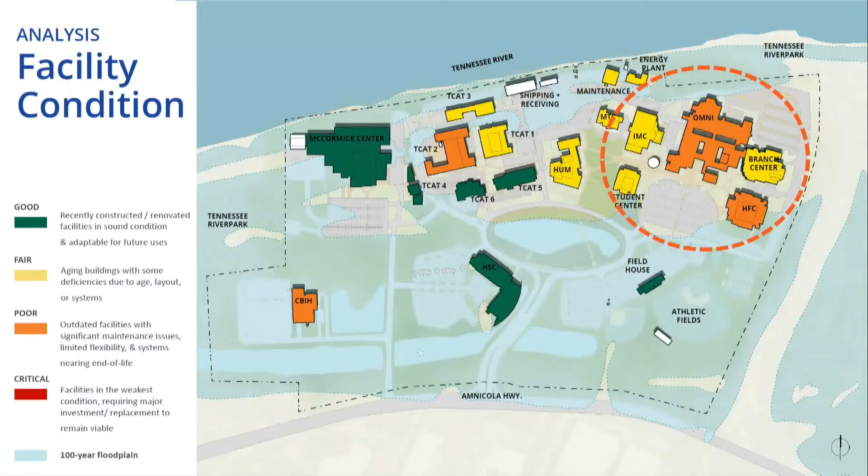As well as to the corner, the Health and Fitness Center. Those have deferred maintenance; their systems are coming to the end. They are not flexible for renovation to the kinds of space needs and configurations for modern learning, and they also are inaccessible in many different ways for mobility, visibility, and audibility.

So the campus plan correspondingly looks at major recommendations in that corner of the campus. On this plan, you'll see the demolition of the existing Omni building highlighted in A with the dashed line, and B, the reinvestment in a major transformative building that I'll touch on later that will be a landmark for academic and student success.

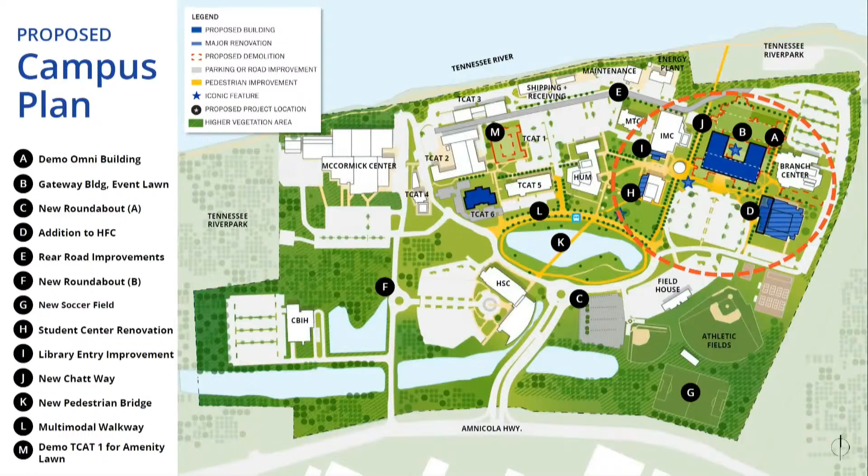Additional small renovations to the surrounding buildings augment what's happening internally and create a front door experience and programming adjacencies for the new Gateway building, the new landmark building. You see those in D, H, and I, also in blue. And then J, K, and L, looking at improved pedestrian connectivity that knits all of this together with buildings in good condition in other parts of the campus, as well as safe vehicular circulation in gray, which is C, E, and F.

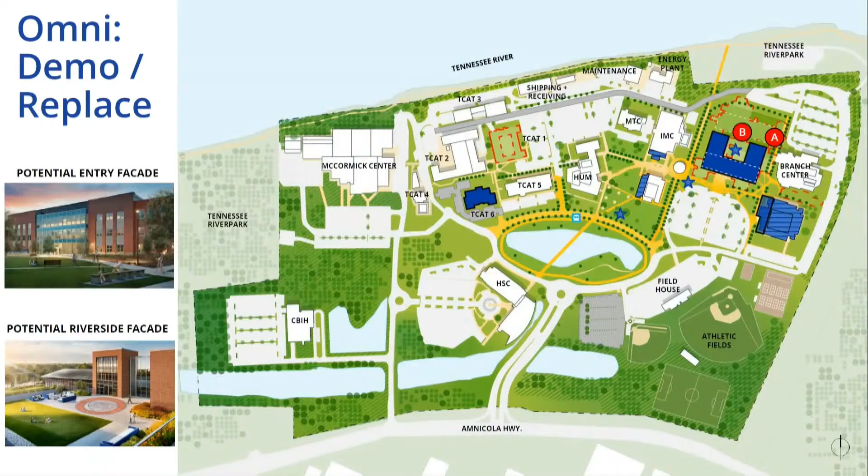So if we highlight each of these, I'll start first with the Omni building replacement, the new Gateway building, and that is to create a dynamic front entry for the campus. It's to put learning and student success on display, to create a front porch experience, and to do all of this with less square footage than the existing building. It also creates an iconic riverfront experience, an event lawn that welcomes students and the community to the campus and creates a strong riverfront presence.

Moving next door to the Health and Fitness Center, that again needs a major revitalization. It augments the programming for student success that's in the Gateway building, and it focuses on improving student wellness for their capabilities as well as academic programs located there.

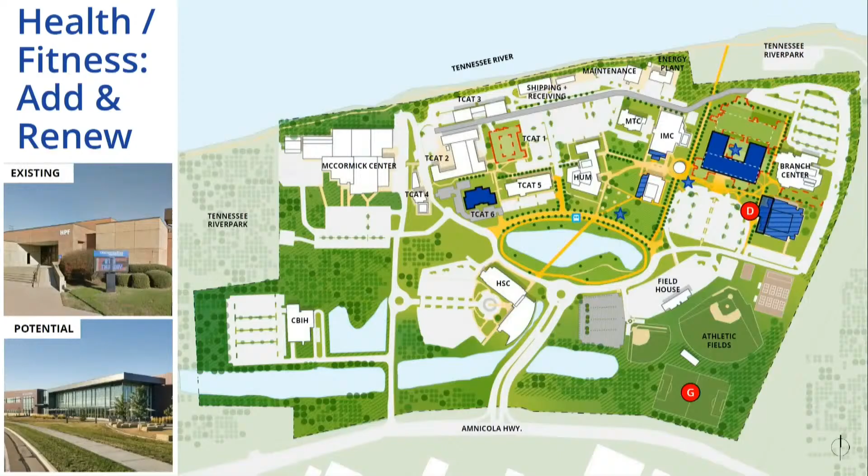There's also a soccer facility, a soccer field in this area that also enhances programming and partnership capabilities for sports on the campus.

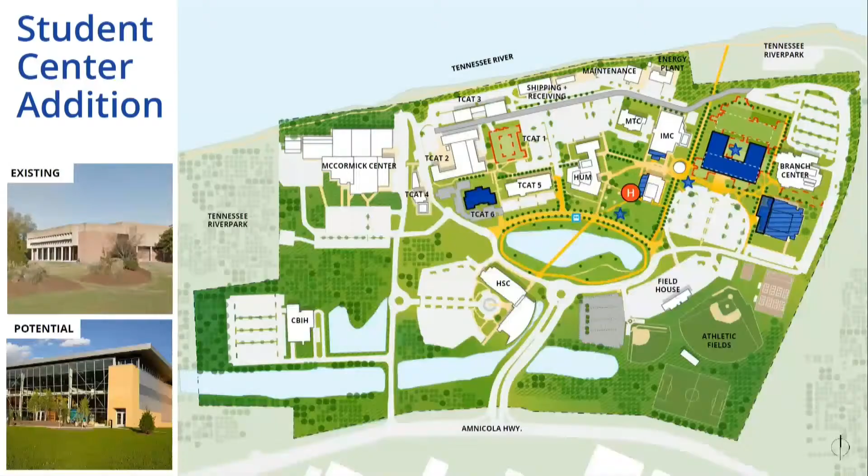On the other side of the entry to the Gateway building is the Student Center addition, again augmenting changes that are happening on the inside, letting students have an accessible entry, one that creates a front door experience that amplifies what is already happening for the Gateway building and creates a better mental health experience with enhanced daylighting and wayfinding.

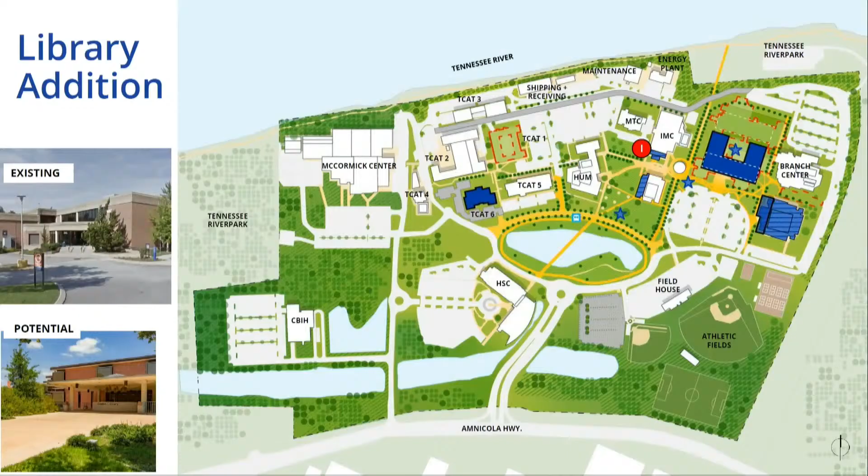Finally, an addition to serve the library, creating a clear, accessible entry there, really focusing on that team-based study space and learning I mentioned earlier, and positions the entire instructional media center in that facility to be that academic support hub right next to the new Gateway building.

Also in yellow, you'll see this network of pedestrian connections that really helps the buildings all connect to the Gateway building, the investments and the facilities around it, and also completely transforms that understanding of how to move from facilities in great condition on the perimeter of campus all the way to the river and the open space around the Gateway building.

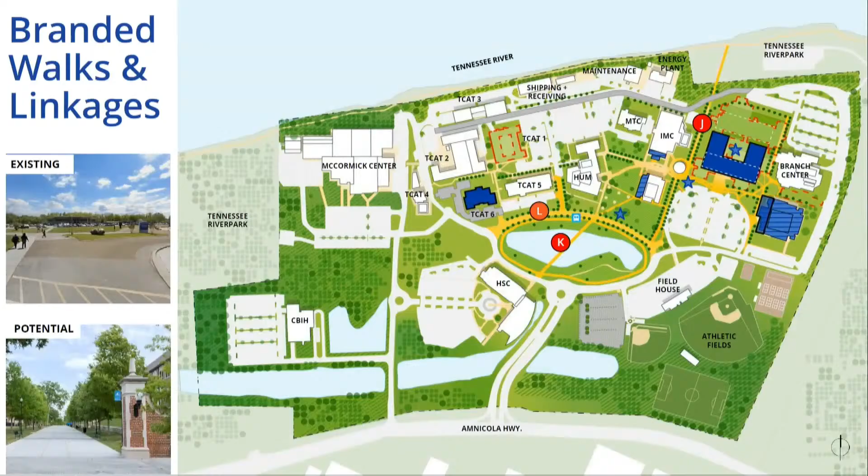Last, but certainly not least, circulation is dangerous in places on this campus. So looking at the new roundabouts that are being positioned, as well as an improvement to one-way roads and completion of a campus loop road, again, allows seamless vehicular movement to the Gateway building, but to other buildings, drop-off and services that complement the pedestrian experiences.

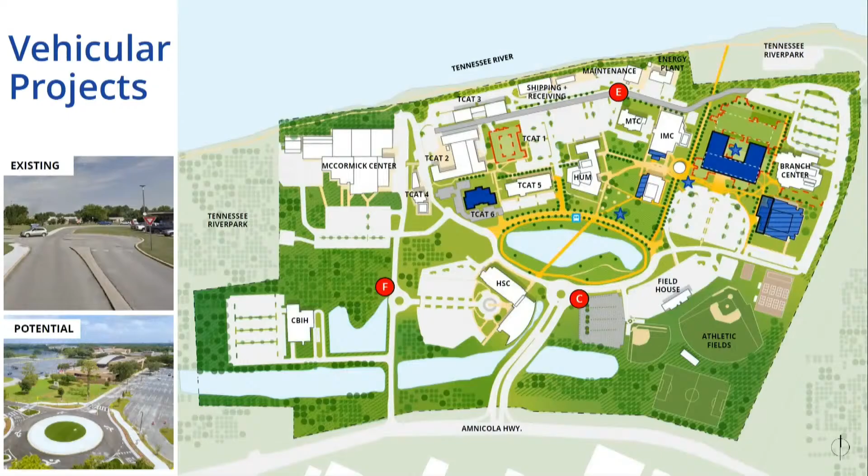And all of this is to transform the existing campus to really be the destination of choice, not only for the city of Chattanooga and Hamilton County, but for the larger region that it serves in the Tennessee River Valley. So I'll conclude my presentation and happy to answer any questions.

Thank you. Questions? Yes, Commissioner? Thank you. Thank you for your presentation.

Just a couple of questions on the Omni or Gateway building, which was the short-term one that you said really needs to be replaced. Yes, assume sir, we'll start seeing requests around that. How old is that building now, do you know? That is well over 40, 50 years. I know Dr. Ashford was actually just looking at college yearbooks. I believe it was opened in 1966 or something.

Okay, thank you. And why do we need to rebuild it, demolish it, rebuild it rather than renovate? There's several reasons for that. First of all is just the configuration of the buildings in that era. They're very low floor-to-floor ceiling heights. So for example, the way the columns are spaced in terms of how students learn, and particularly the lab space, it's very difficult to reconfigure that. It's also a very sprawling complex, so literally people do get lost. It's very hard, even within a class change period, to get from one end of that building to the other. And the other is the mechanical systems are really at the end of their life, and so you would need to completely replace those in the future to just even deal with modern code and HVAC standards.

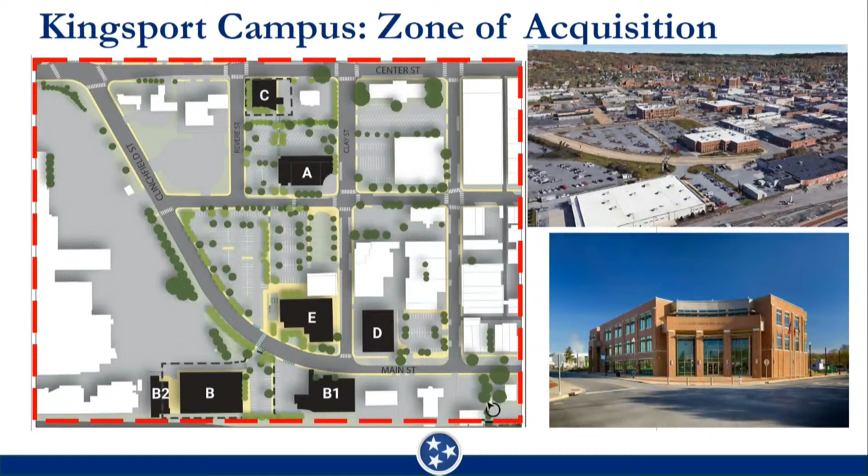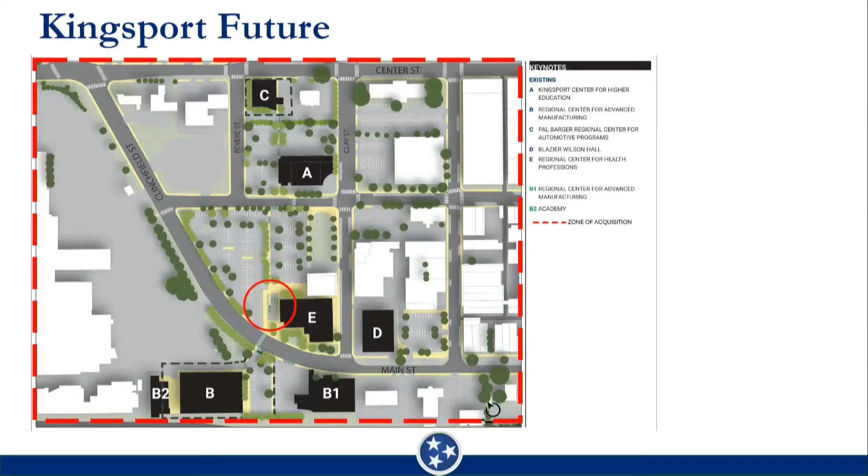Nursing has to expand. They have insufficient space there. They're pretty much at capacity now, and as their enrollment grows, they will be at capacity. When they need additional space, it should happen on that side of the campus, but they don't own that building yet, so we're not going to show an addition to it, because I don't think we should, but that's where it'll go when and if they can acquire it.

Elizabethton is under construction. The architect's rendering is on the right-hand side. It's a great design, I think. We thank you for your approval of it in the past. And that's moving ahead, under construction now.